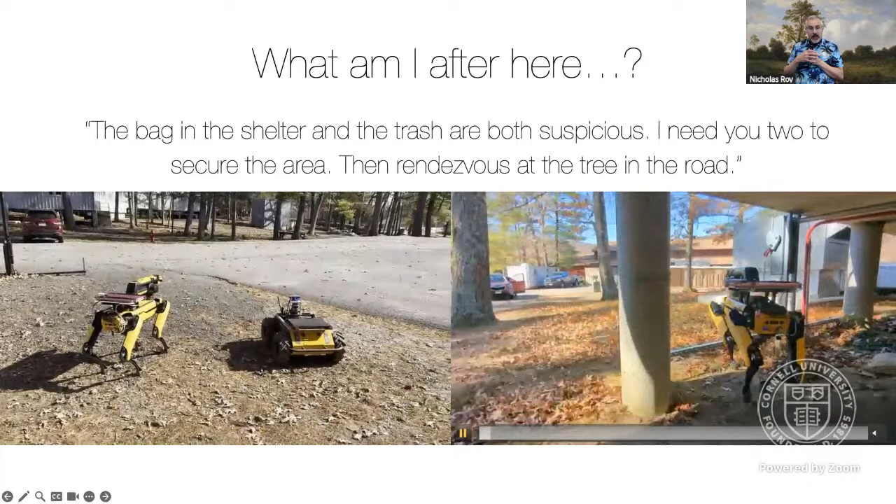So the kind of thing that I'm after is, both of these videos show an experiment that we did at West Point in upstate New York last fall, where the idea is that you have a team of robots that have to go and carry out some kind of mission that's specified by a human commander.

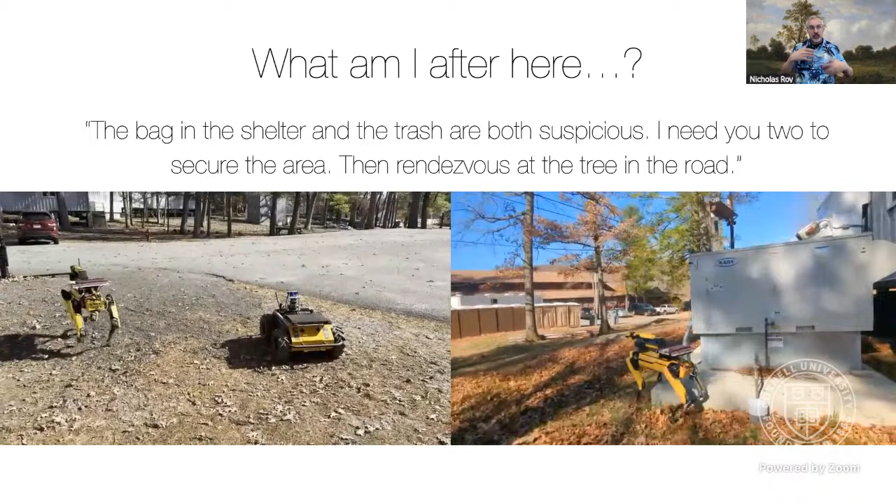This is West Point, this is an Army-funded project, so you can imagine what the military applications are. But even civilian first responders might actually need robots to go and fan out and explore an environment, either looking for suspicious packages, suspicious objects in the environment, or looking for people who might be in distress in some kind of disaster response scenario.

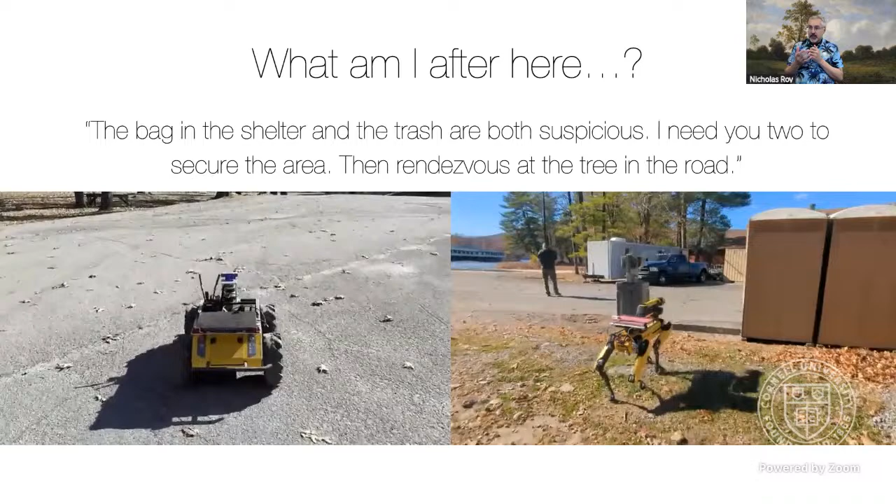And then rendezvousing at the tree in the road requires reasoning about all these different kinds of trees and where they are in the world, and what it means for the robots to actually collaborate and come together. This kind of mission is a real challenge for a lot of the autonomy systems that we see deployed on real robots these days.

And this typically happens at a relatively fast duty cycle and is the kind of thing that works extremely well in our robots. This low-level control exists in pretty much every single operational robot that exists today, whether it's a self-driving car, a factory robot doing assembly, or a drone doing some kind of inspection. This is the kind of technology that we've studied for decades and we know how to deploy really well.

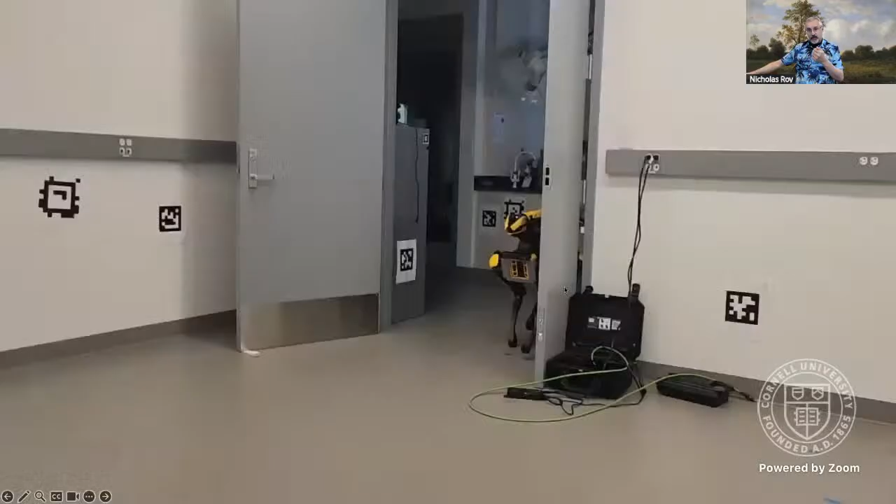And so this video shows an example of my students working with a Spot robot. The Spot is a remarkably capable robot. This is arguably one of the best robots, or the best robot I've ever worked with. It's able to abstract away an enormous amount of the underlying environment. The robot doesn't need to know about the bags in the world in order to pick its way across them. And yet, at the same time, something goes wrong when the unexpected happens.

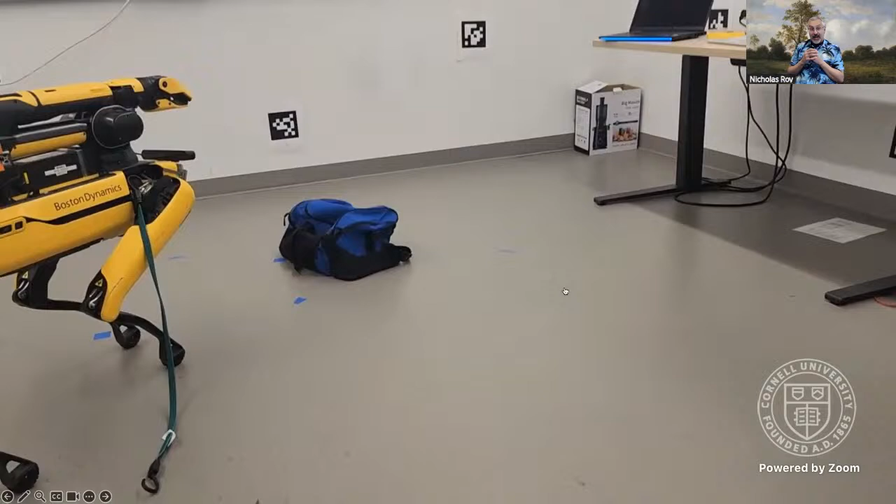The robot stepped on a bag, and its interaction with the environment wasn't what it expected. It paused. The student in this case took the bag out of the way, but the robot knew it needed to get its foot out of something that was there. And then, unfortunately, the robot took a big step forward. It didn't understand its own model, and that giant step it tried to take ended up knocking the bungee cord that was holding the battery in place off its position. The bungee cord came unhooked, the battery fell off, and the robot lost power.

So this is an extreme example of the kind of thing that can happen when you don't get these abstractions correct, or don't get the interaction between these different levels of abstraction correct. We know we need these abstractions in order to do efficient planning, efficient reasoning about the world, and efficient learning. But at the same time, we have to think carefully about what these abstractions are doing for us, and what loss of information might occur between these different abstractions.

So that's really what I'm going to talk about for the rest of my talk today. I'm going to talk about how we actually address the loss of robustness that might come from these abstractions that give us computational efficiency, and how we get that robustness back. I'm also going to talk about how these abstractions give us computational efficiency explicitly for the purposes of solving more complicated plans. And then if I have time, we're going to talk a little bit about learning efficiency, and how we can use these abstractions to learn more efficiently and drive down the data complexity of learned models. So let's dig in.

The first thing I'm going to say is that these abstractions often give us uncertainty. That uncertainty can come in different flavors.

You may have heard of out-of-distribution detection, where we have learned models trained on a set of training data, but then they are faced with a particular image that contains properties that weren't present in the training data.

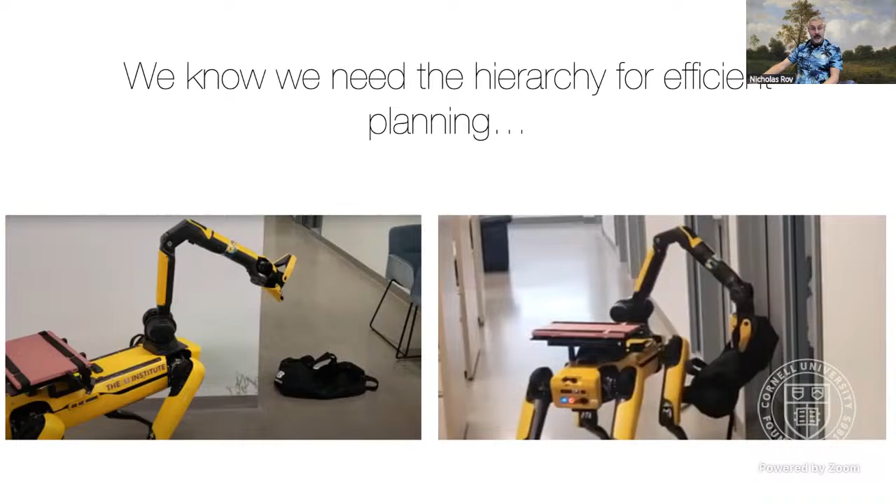Luca's been working for the last few years on this structure known as a scene graph. Those of you who know Luca know he's very well known for tremendously great work in mapping and SLAM. One of the things Luca noticed is mapping and SLAM itself is very computationally intense as we increase the length scale and space of operations of our robots. So really some form of abstraction is required in order to break the world up into places, rooms, buildings and regions of the world, primarily for the purposes of efficient inference.

In collaborating with Luca, we've recognized that hierarchical structure is also super useful for efficient planning as well. Luca has developed this rich technology that breaks the world up and builds the low-level geometry of the environment, but it can also detect objects and build object meshes, and then break the world up into places and rooms, etc.

For the purposes of planning, we can convert those objects and places exactly into predicates of objects, where they might be in the world. So we can get the relations between the objects and the places they might be, predicates that describe how the world is connected. And if you're familiar with task and motion planning, this kind of logical representation is often how we express high-level task plans that then get converted into motion plans.

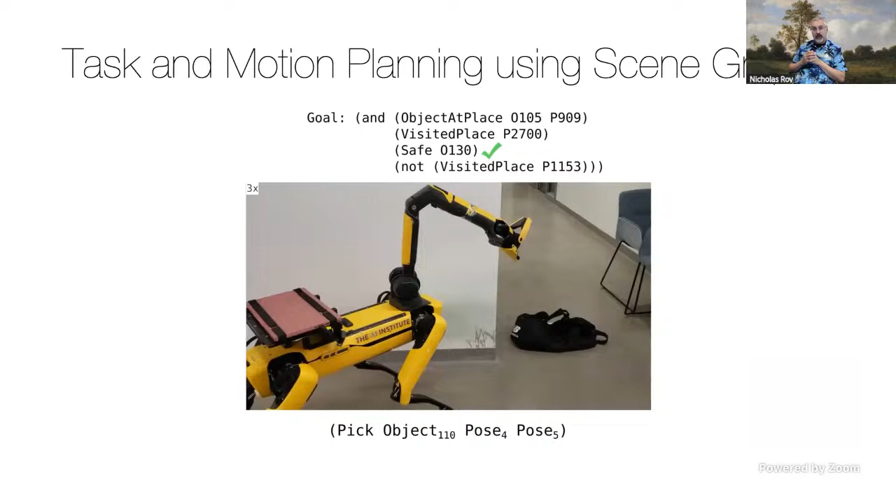This is an example of us using task and motion planning on top of a scene graph, where we took that building 45, sixth floor representation, and gave the robot the goal of being able to deliver an object to a particular place while making sure it's safe. We identified that certain kinds of objects were safe or unsafe. The robot is able to recognize an object in its way and move it out of the way to free up that passage through the environment.

And this, we're continuing to build. This is one of the first results we had at the end of 2023. We're very happy that we were able to get these kinds of complicated plans out of this environment, and we're starting to increase the size of the environment we're dealing with.

We did some experiments at University of Pennsylvania a couple of weeks ago. We're building rich scene graphs over hundreds of meters in and around buildings, and we're able to execute these kinds of plans relatively efficiently. We see the impact of the sparsity of the representation on the planning time.

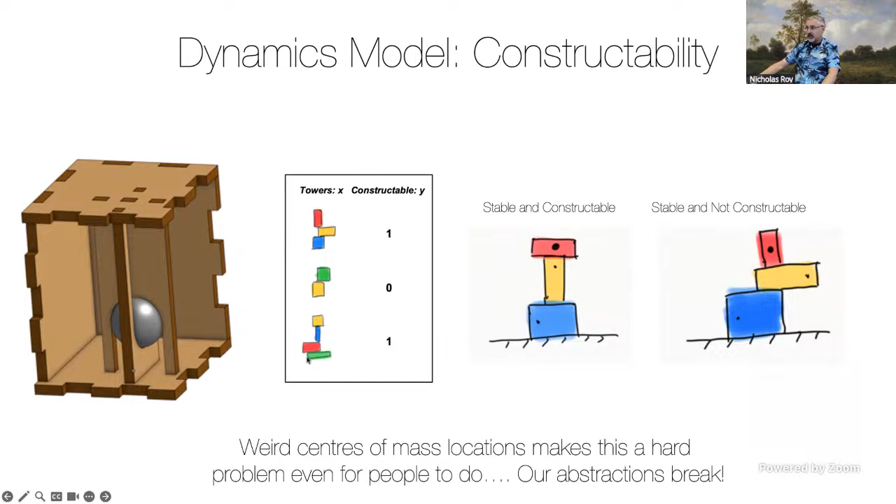But if I have a weird center of mass, then my abstraction is going to break because this might actually be stable, but it might actually be very hard to construct. And so how do I actually allow my abstraction to understand that there's more going on at the very lowest level here? Well, one thing that we did was we gave the robot a bunch of these objects and said learn about these objects and learn how the centers of mass vary across these different objects, and then learn how you might stack these different objects.

And we let the robot, this is essentially an arm farm type idea. All these objects had AprilTags on the side that allowed the robot to uniquely identify each object. And it was able to learn how the center of mass varied with each object, and it could learn how to do different kinds of stacking and tasks, etc. Over 55 hours, relatively slow process, but it worked relatively well, and we were able to get some measure of efficiency of how to learn to do these things well.

But what if we don't know the dynamic model parameters? What if we can't observe the center of mass from passive imaging? Do we really have to learn how to grasp every new configuration, each new object from scratch? And the answer is no. Because if we learn how centers of mass might vary, then maybe we can factor the problem, factor the abstraction of grasping into the basics of just mechanical grasping and learning how to adapt to the center of mass. So I don't have to learn how to grasp every new object from scratch.

What I need to do is I need to learn how to grasp, and I need to learn what centers of mass mean for the purposes of grasping. And so by factoring the representation into grasping and adapting to different objects, I can adapt very, very efficiently. And humans do this very naturally. So this image here isn't of blocks. This image is of different hammers. And most of us are familiar with the idea of picking up a hammer and kind of hefting it a little bit to figure out how heavy it is and what it's going to mean in order to swing.

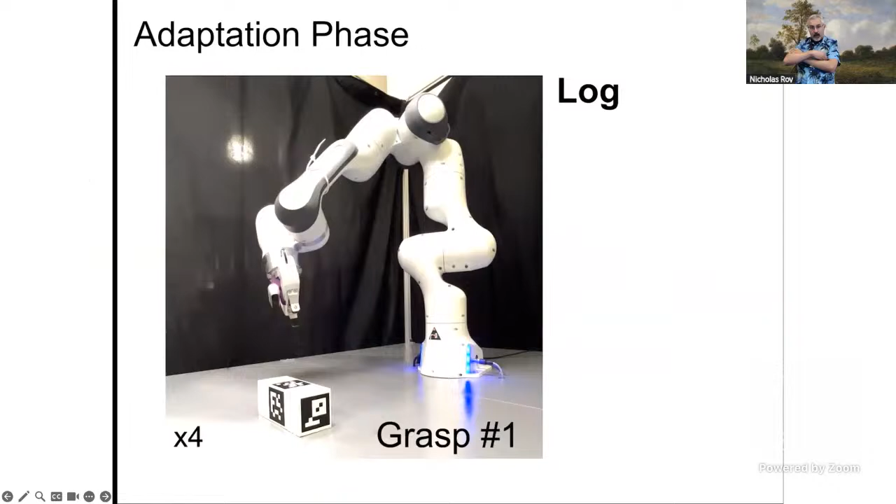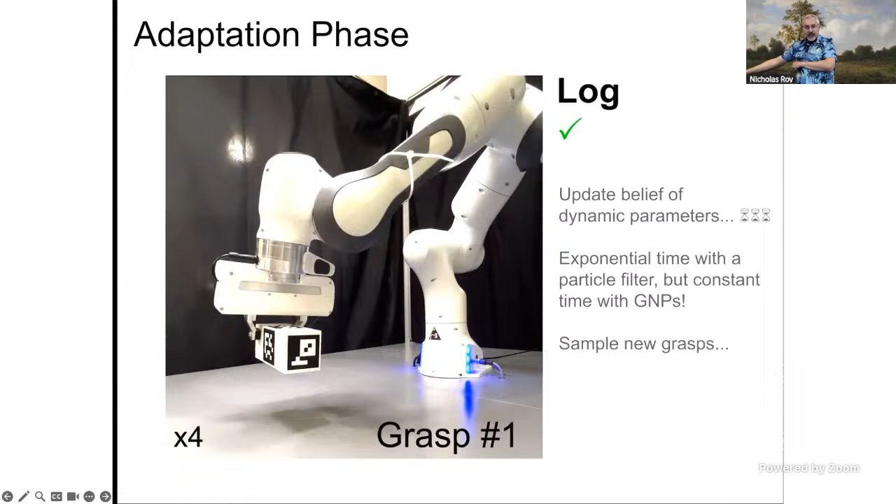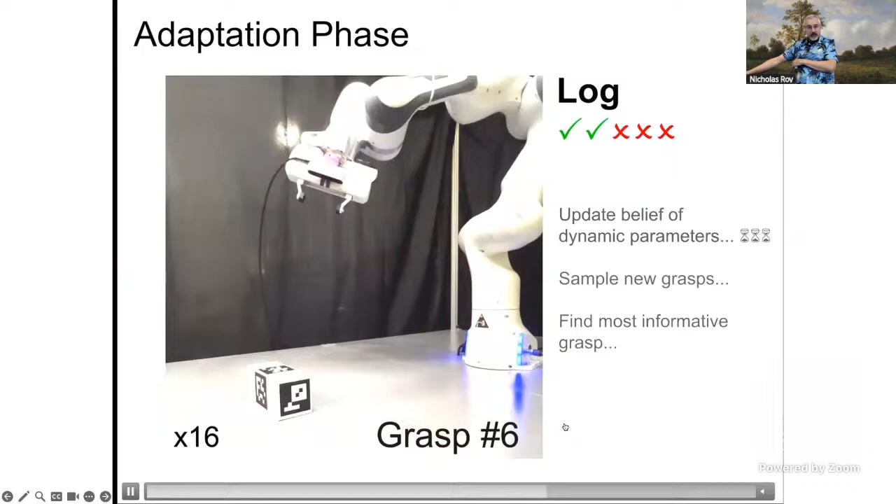So this is a robot that is learning what it means to grasp these different objects. And in this case, it's actually adapting, and it's able to adapt very, very efficiently. One of the things that we did was we showed we could use learned models to drive that adaptation much more quickly than if you were just doing straight out of the box inference on some kind of latent manifold.

And so it interacts with these objects over a while, and then it's able to actually get an understanding of the object, and then it's able to build different structures of the kind that we give it.

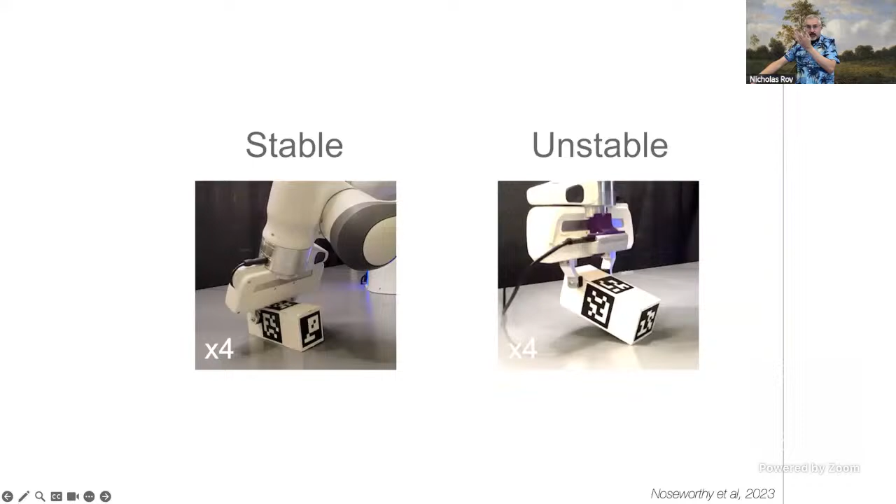And I'm going to skip over how we actually do this inference relatively quickly, but we're able to very quickly learn how to grasp these objects stably. And the abstraction lets us reuse the parts of the model and learn just the new parameters as needed. And then we're actually able to do relatively sophisticated assembly.

What's cool about this particular video here is that we actually showed that we could put together a lot of the different things that we've been building in my group, which is the high level symbolic task planning coupled with the low level models of skill acquisition in order to build a relatively complicated planetary gear mechanism here.

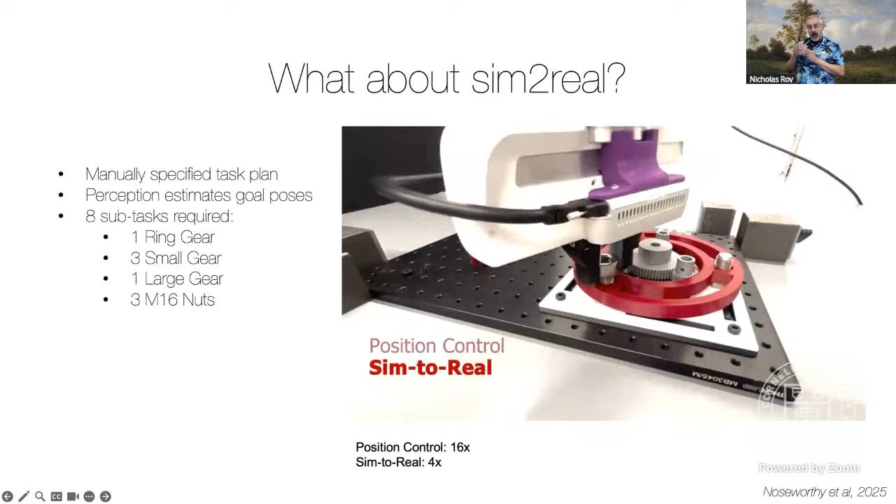And what's also super interesting about this is that we were actually able to learn the appropriate abstractions in simulation. And then we were able to show how we could transition that learned simulation to an actual real robot, even when the learned simulation wasn't necessarily physically realistic, by actually capturing how the simulation, which is in itself a form of abstraction, is going to differ from the real world.

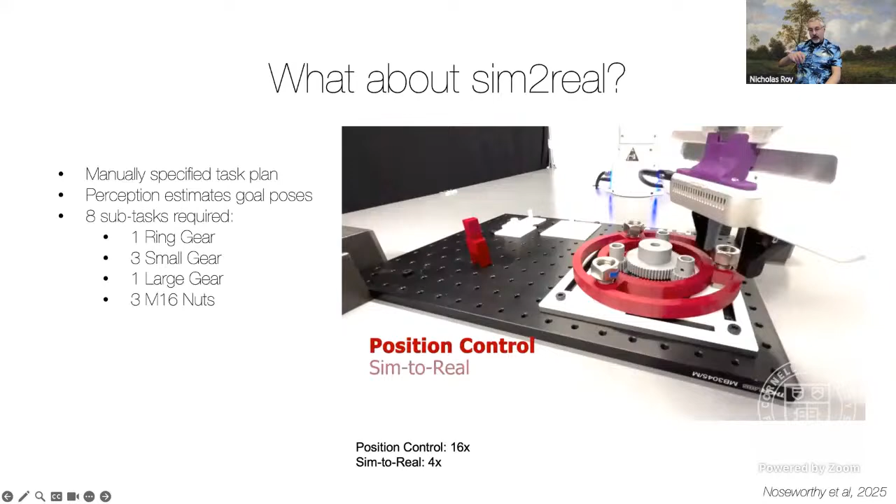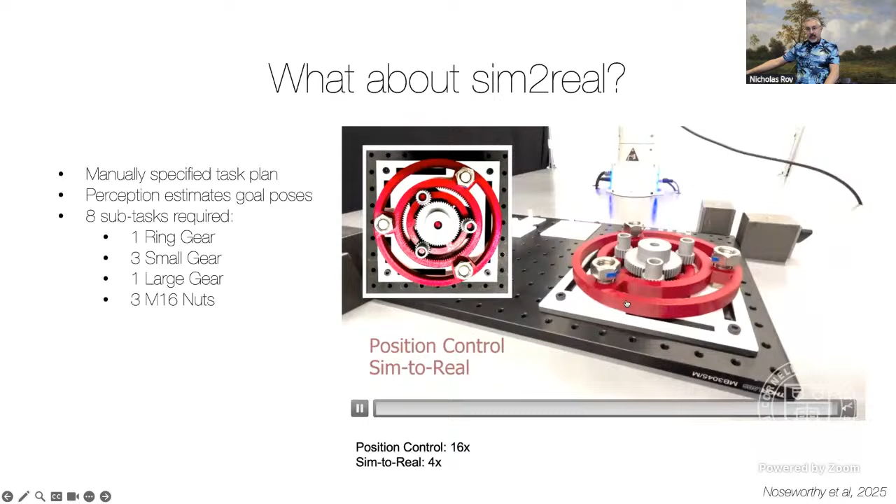We can actually learn policies that are robust to those differences and execute them on this relatively complicated mechanism where we're dealing with threading nuts, and we're aware of the problems of cross-threading, and we're aware of the challenges of getting these gears to mesh, and we're able to build this mechanism in a way that's really, really nice.

So just to wrap up here, hopefully I've convinced you that most, if not all, real robot systems, in order to carry out complicated missions, are relying on abstractions that allow the robot to reason at different representations of the environment. But those abstractions are necessarily imperfect. And so there's losses of performance that can come if you're not careful about what you represent at the boundary between these different representations.

And so things that we need are being able to actually model the uncertainty that can come from these abstractions. We need to actually reason about what is the right information to extract from the lowest level representation to allow planning efficiency, and how do we actually factor these models in order to get not just computational efficiency, but learning efficiency.

And we know we need these abstractions. We know we're getting at good ways of getting these abstractions. And hopefully these three principles of learning efficiency, robustness, and computational efficiency can give us new ways to actually make more robust and efficient robots.